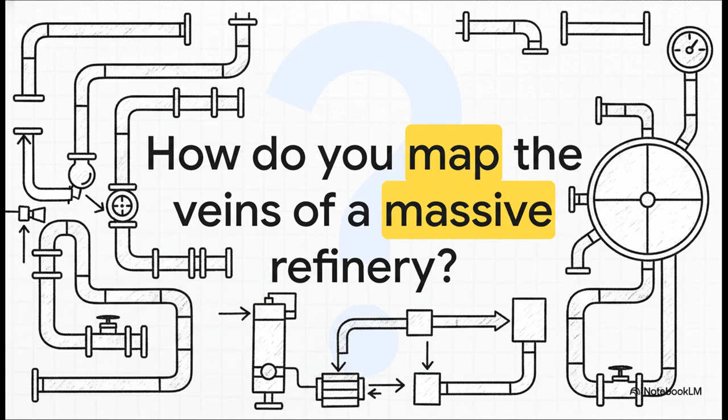The engineers who solve this massive, high-stakes physical puzzle, those are piping designers. And today, we're going to learn exactly how they pull it off. Here is our roadmap for today. 1. Process plants and piping basics. 2. Industrial codes and standards. 3. Decoding PFDs and P&IDs. 4. Instruments, valves, and equipment. And 5. Isometrics and stress analysis.

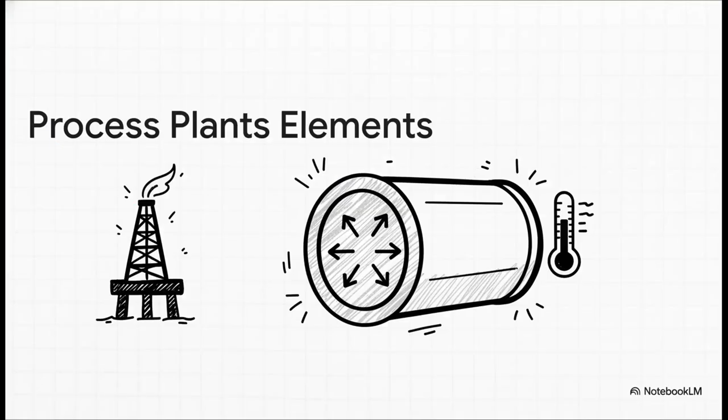Section 1. Process plants and piping basics, the foundation. As a piping drafter, your work literally forms the critical infrastructure for massive process plants. We're talking oil and gas facilities, refineries, and petrochemical plants. You are the one responsible for understanding the fundamental materials that make these complex operations actually work.

And that means you've got to know the different manufacturing types of pipes, and crucially, how to calculate pipe wall thickness. This is an absolute baseline engineering requirement. You can't just pick a pipe off a shelf, right? You have to mathematically ensure that its wall thickness can withstand the immense pressures and extreme temperatures of the specific chemicals flowing inside it.

Section 2. Industrial Codes and Standards, the Universal Language. Think of it this way. Without a universal language, a process plant would be a chaotic, incredibly dangerous puzzle. Safety and consistency are just completely impossible without strict adherence to international engineering codes.

If an EPC engineer sitting in Houston is designing a plant that's going to be built over in Dubai, they absolutely need to know they are speaking the exact same mechanical language. No room for translation errors here. Understanding exactly who writes that language is a non-negotiable prerequisite, especially if you're gearing up for a plant design interview. So let's look at the heavy hitters.

First up, you have ASME, the American Society of Mechanical Engineers. Knowing your ASME B31.3 for process piping or B31.1 for power piping is absolutely mandatory for survival in this field. Then you have ASTM, which dictates the standards for your actual physical materials. We've also got API, the American Petroleum Institute, and ISA, which gives us the exact precise symbols we need to draw our instruments. You really have to know these organizations inside and out.

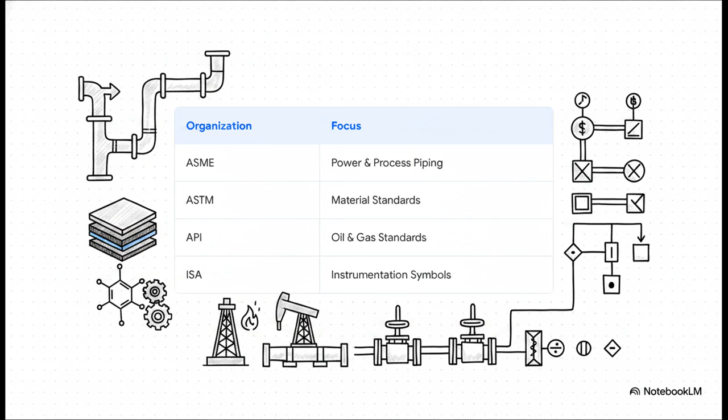To give you a sense of the sheer scale we're talking about, the American Petroleum Institute alone has developed over 800 consensus-based standards since they were established way back in 1919. Over 800. And listen, these aren't just polite suggestions. These are rigorous, uncompromising rules designed specifically to enhance operational safety and environmental protection across the entire globe.

Section 3. Decoding PFDs and P&IDs, the plant storyboard. Okay, long before a single piece of steel is ever cut, these massive facilities are mapped out using two vital documents. First is the PFD, or Process Flow Diagram. This is your conceptual bird's eye view. It's simplified. It shows the sequential steps, inputs, and outputs.

But then you step it up to the P&ID, the Piping and Instrumentation Diagram. This is the complex, highly detailed graphic that shows exact interconnectivity, safety schemes, and control mechanisms. It is the core storyboard of your entire facility.

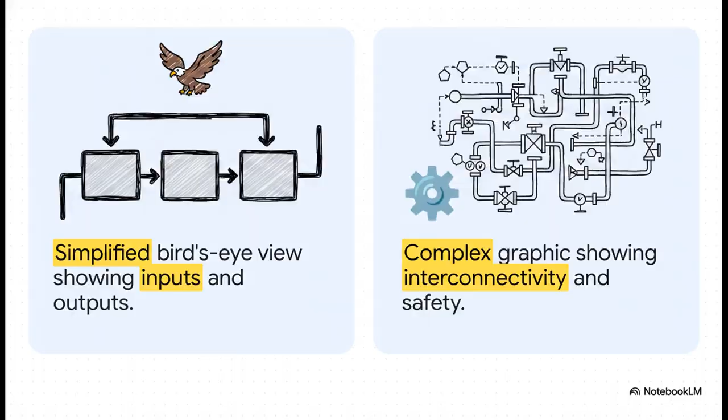But here is a really vital secret of the trade. A P&ID actually can't show every single detail, because if it did, it would turn into a cluttered, completely unreadable mess. So to get around that, they rely on three critical support documents to hold all the nitty-gritty specifications. You have the PMS for your nuts, bolts, and gaskets. You have the EIS, which holds the extensive testing codes and material guarantees. And finally, the FRS, which details exactly how the whole system communicates and functions.

Now, to actually sit down and read a P&ID, you've got to master the ISA S5.1 standard. Think of this as your visual grammar. It's a consistent, system-independent way of communicating everything about the instrumentation using very specific graphical elements. If you don't know this standard, I promise you, a P&ID is just going to look like a bunch of random circles and lines scattered across a page. Memorize these shapes. They are your new alphabet, and you're going to use them constantly in CAD and 2D drafting.

A simple circle? That means you're looking at a discrete individual instrument. If that circle is inside a square, well, now it's a shared display or control. A hexagon indicates a computer function. And what about a diamond inside a square? That is your programmable logic controller, or PLC. Just by glancing at the shape, you instantly know the device category.

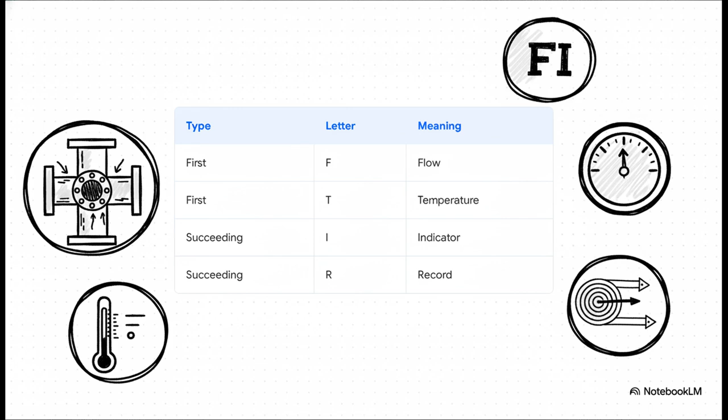So what goes inside those shapes? Letters, of course, and they are defined precisely by that ISA standard. The first letter tells you the actual variable being measured, so F for flow, T for temperature. The succeeding letters tell you the function, I for indicator, R for record. Put it all together, and a circle with FI inside immediately tells the operator they're looking at a discrete flow indicator. It's an incredibly elegant, efficient visual language once you get the hang of it.

Section 4. Instruments, valves, and equipment. The physical hardware. All right, let's talk about valves. Valves are essentially the traffic lights of your piping system. They regulate, direct, or completely stop the flow of fluids. But a valve isn't just a valve. You have to specify the exact right type for the job.

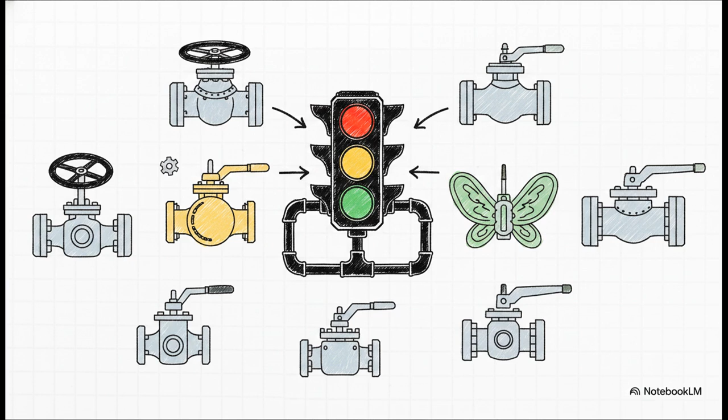A gate valve is fantastic for completely stopping flow, while a globe valve is much better for regulating it. You also have check, ball, plug, and butterfly valves. In the real world, picking the wrong valve doesn't just cause a little inefficiency. It can lead to catastrophic pressure failures.

Beyond the pipes and valves, your layout also has to account for massive pieces of industrial equipment, and this is broadly categorized into two main types. First, you've got static equipment, basically things that don't move. This includes massive storage vessels, heat exchangers that transfer thermal energy, and those towering distillation columns. Second, you have rotary equipment. These are the things that spin and do the heavy lifting, like pumps moving liquids, compressors handling gases, and massive turbines.

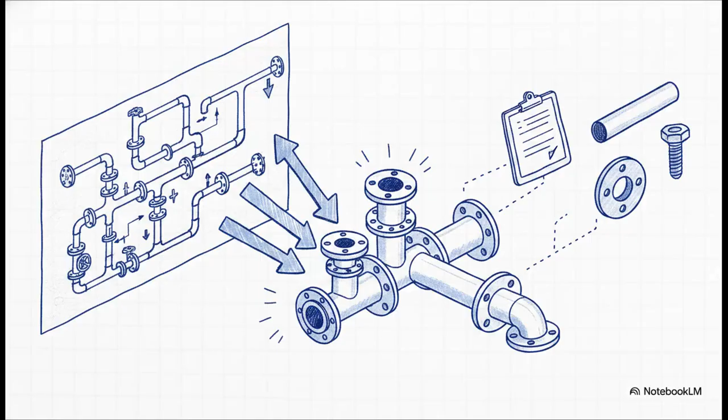Section 5. Isometrics and stress analysis, the final execution. Welcome to the world of isometric drawings. This is where those flat 2D concepts become highly accurate 3D representations. These drawings translate the P&ID and the general arrangement plans into a format packed with exact dimensions, detailed callouts, and specific symbols. But most importantly, an isometric drawing generates the BOM, or bill of materials. This is your exact material takeoff. Literally, every single pipe, flange, and bolt that is required for actual construction is listed right here.

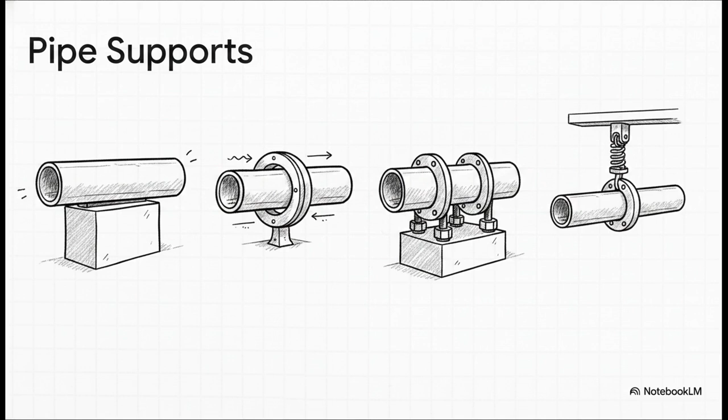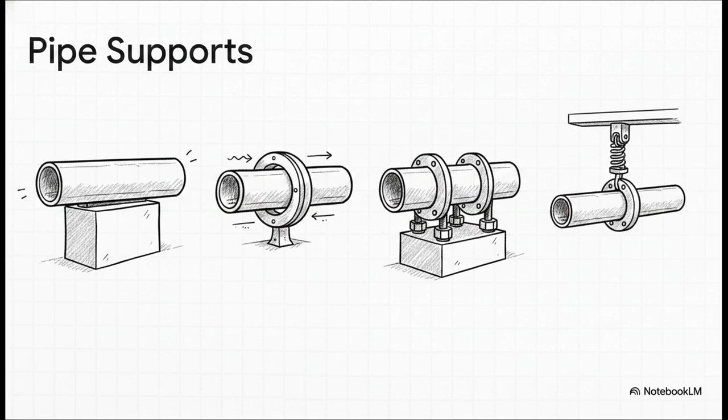Now, here is something that is so often overlooked by beginners. You can't just float tons of metal filled with highly pressurized, boiling liquid up in the air. You must design and select the correct physical supports. You have resting supports taking the vertical weight, guide supports that allow for specific movement, anchor supports locking the pipe completely in place, and hanger supports suspending them from above. Getting this part wrong is a classic root cause for industrial accidents, where pipes will literally rip themselves apart just through thermal expansion.

And that brings us to the final workflow of a piping engineer. Step 1. You lock in the equipment layout and the exact orientation of all the nozzles. Step 2. You draft those hyper-accurate piping isometric drawings we were just talking about. And step 3. You perform static pipe stress analysis. You mathematically prove, using specialized software, that those pipes are not going to break under the stress of gravity, internal pressure, and extreme temperature changes.

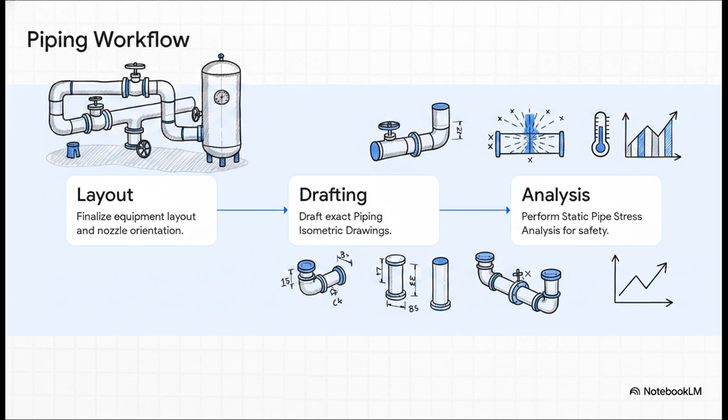Which leaves us with one final thought to consider. The stakes in piping design and drafting are just incredibly high. A single misread ISA symbol, the wrong ASME code, or a failed static stress analysis can literally bring an entire multi-million-dollar refinery to a catastrophic halt. The precision you bring to these documents forms the very backbone of industrial safety. So ask yourself, are your blueprints truly ready for the real world?

For those of you looking to build a serious career in this industry, keep reviewing those codes, master your P&IDs, and never stop learning.